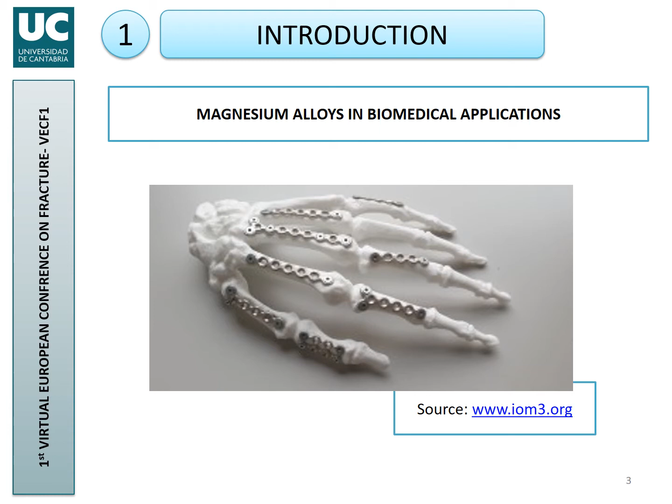Concerning environmentally assisted cracking, just a brief overview. We need 3 ingredients acting all together to have environmentally assisted cracking. In this case, a susceptible material, which again is a magnesium alloy, an aggressive environment, which is given by the human body, and tensile stresses.

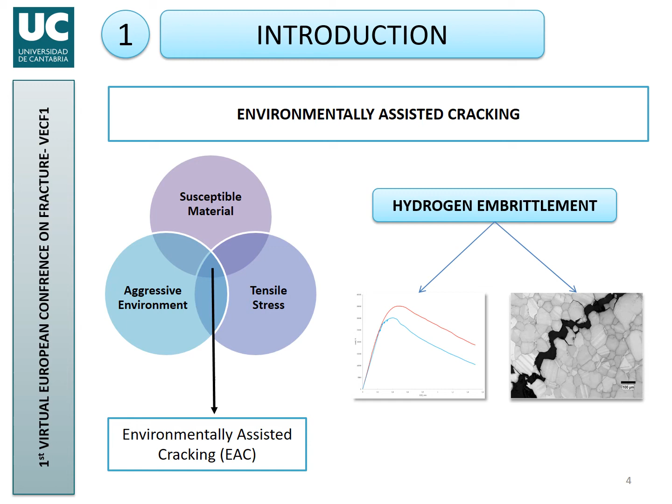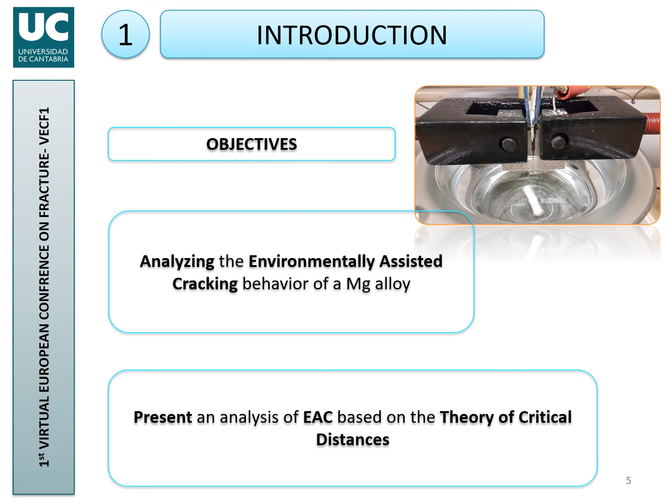So the objectives of this work are first of all to analyze the environmentally assisted cracking behavior of a magnesium alloy, and to present the theory of critical distances as a reliable tool to analyze environmentally assisted cracking.

Concerning the theory of critical distances, I guess that this symposium does not require an in-depth explanation of the theory of critical distances. Just to mention that it has been widely validated on fracture and fatigue processes, different types of material, different types of conditions, and it may be used to predict how the apparent fracture toughness of the material increases when the notch radius also increases. That is, it is a really interesting tool to analyze the notch effect, both in fracture conditions and also in fatigue conditions, a critical process and a subcritical one.

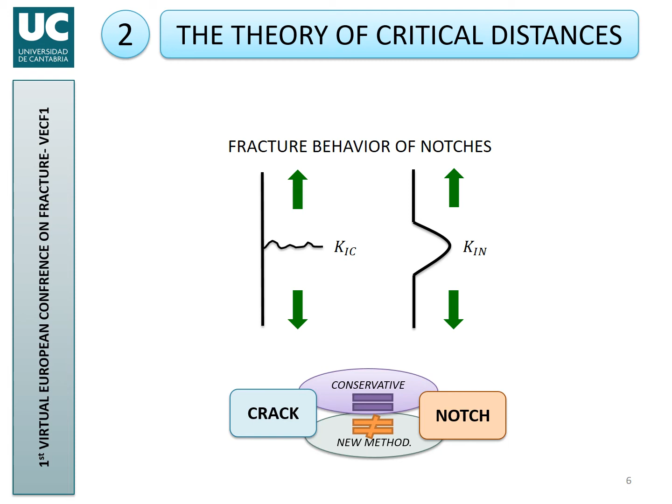The theory of critical distances just needs an additional material parameter, which is usually the proper critical distance, and this critical distance comes together with another one, which is the inherent strength. Both parameters are related to each other through the fracture toughness, if we are talking about fracture processes, so at the end it is just one additional parameter.

The theory of critical distances actually comprises a group of methodologies, all of them using this critical distance, and one of them is the line method. Other methodologies are the point method, the area method, the volume method. This work just uses the line method, which establishes that, if we are talking about fracture, fracture takes place when the average stress along a certain distance, which happens to be twice the critical distance, equates the inherent strength.

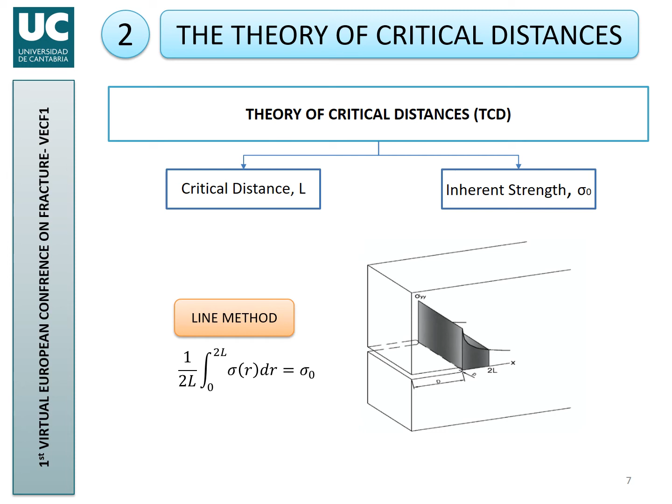As I told you, the theory of critical distances has been successfully applied to fracture and fatigue. And what we propose here is to apply the theory of critical distances in environmentally assisted cracking conditions. We have already published works on the application of the theory of critical distances in the analysis of environmentally assisted cracking processes in structural steels, and the results were really good.

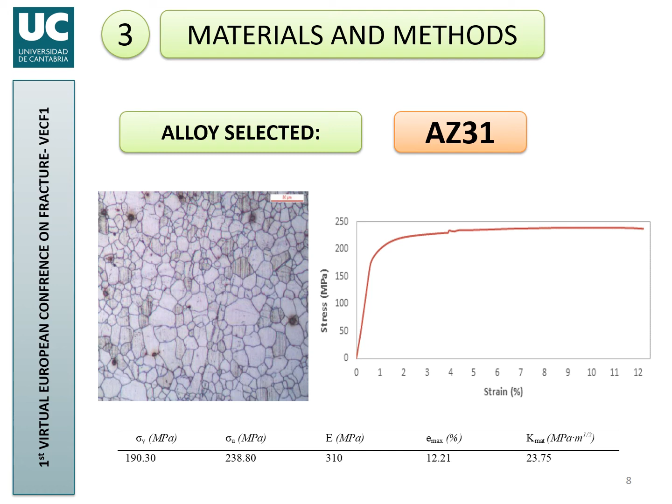And now we are applying it on magnesium alloys, biomedical materials. And the alloy selected in this case is AZ31. There you have the microstructure and the tensile curve. There is a typo there in the elastic modulus. It is 31,000 megapascals, of course, and you have there the other mechanical properties.

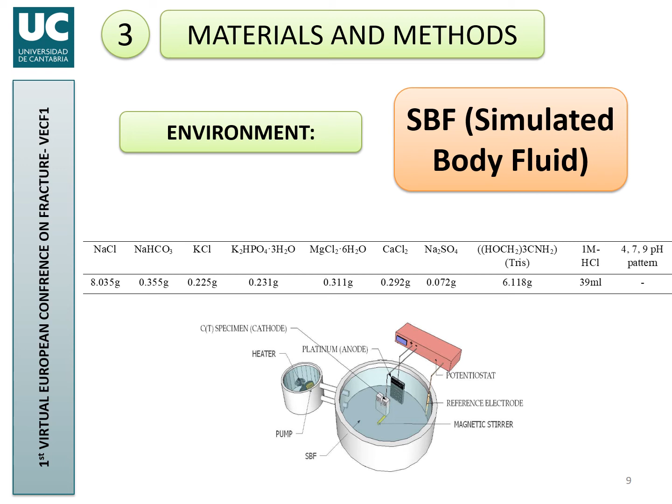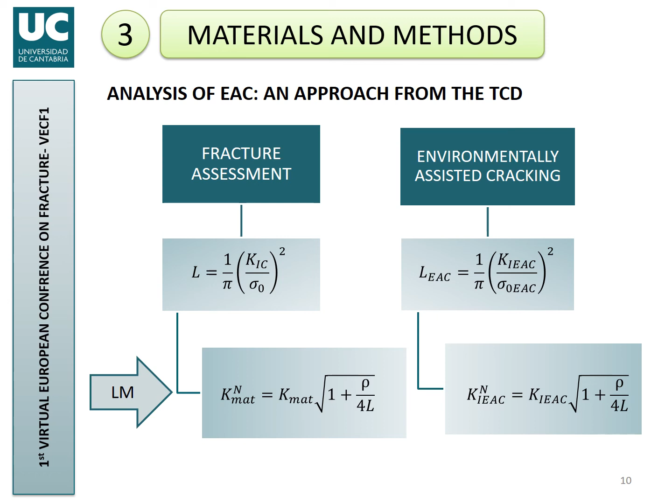The first one on the bottom left side is well known. It's for fracture conditions, and it was not proposed by us, of course, but the expression on the bottom right is our proposal to predict the environmentally assisted cracking threshold for the material when containing notches, which is equal to that one observed in cracked conditions multiplied by the same factor to take into account the notch effect. The reasoning is exactly the same as that known for fracture and for fatigue. In this case, it is applied in environmentally assisted cracking conditions.

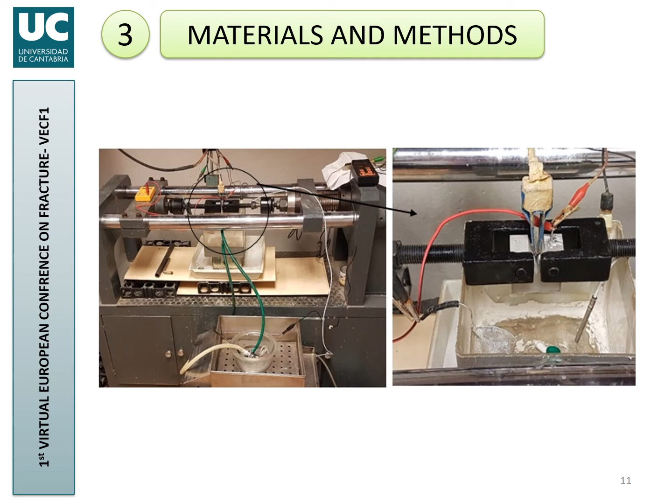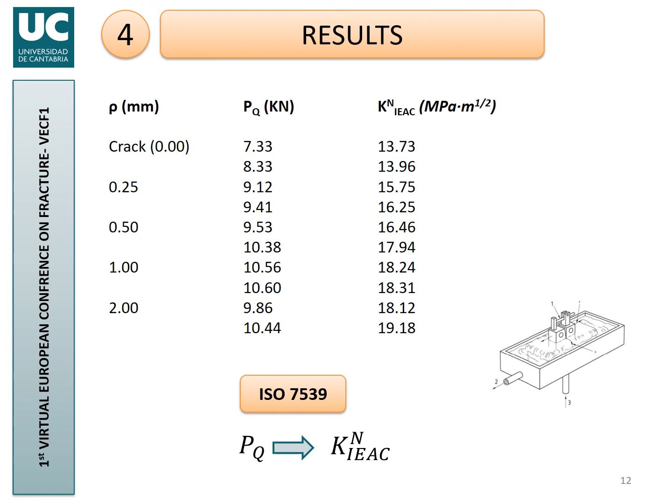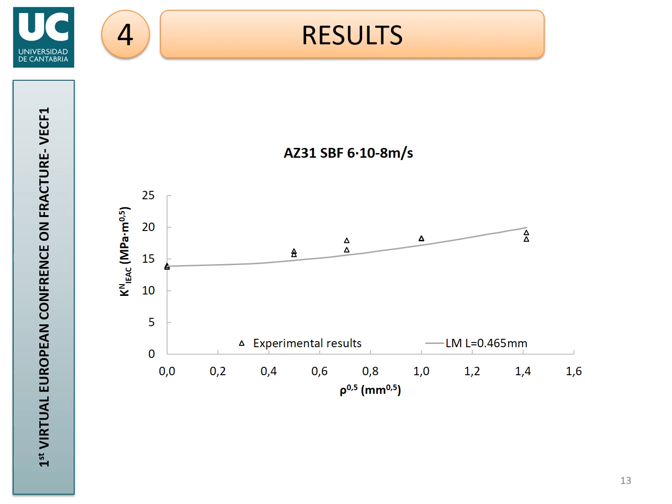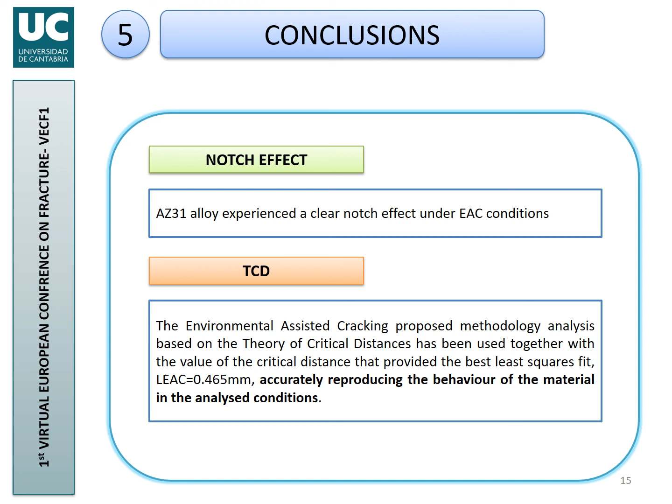In this case, we have applied just a best fit to see whether or not the curve is able to reproduce the evolution. But in other cases, we have first established a calibration of L, not by best fitting, but through finite elements, and the predictions were also good. So the theory of critical distances seems to accurately reproduce the behavior of the material in the analyzed conditions.